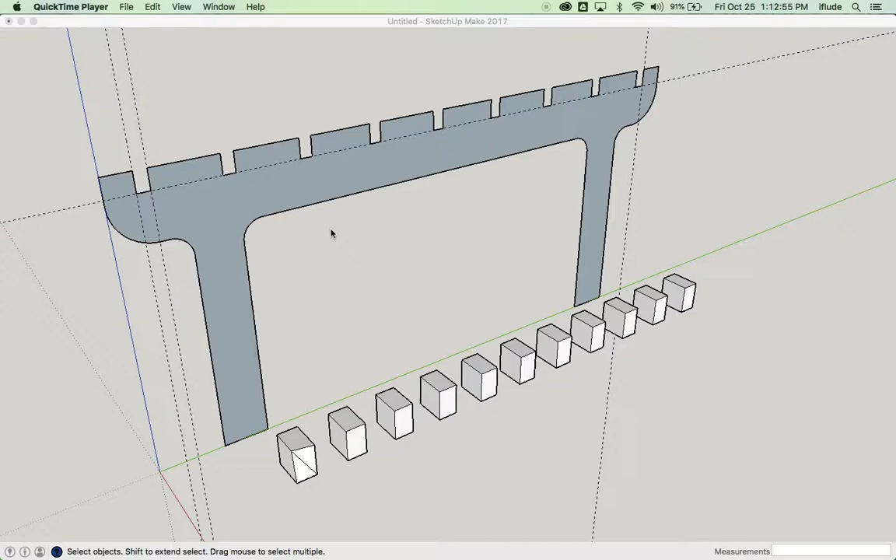So in the previous video, I just used these little blocks down here to explain the concept of moving and copying, and then making multiple copies based on that. Now I want to get rid of those, because they're not part of this model.

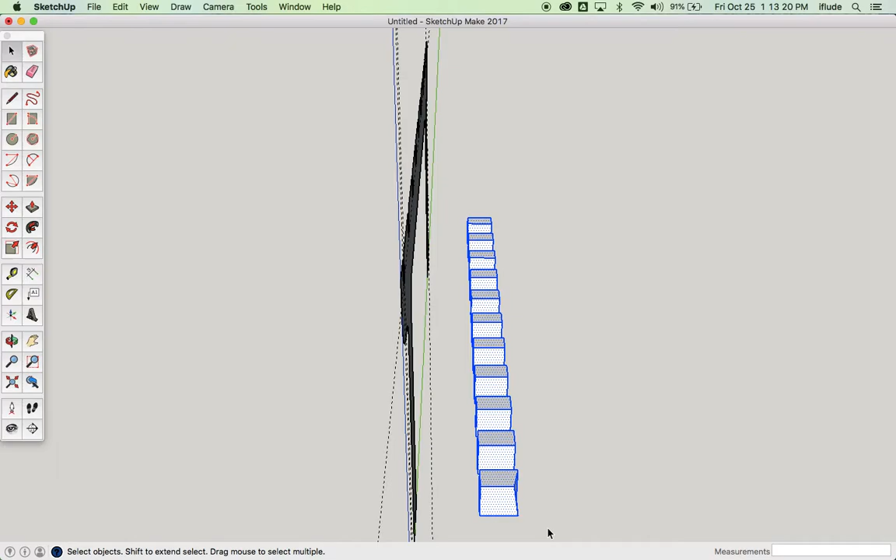So I'm just going to move my view around here like that, and then use my selection mode where I'm selecting everything within my marquee, in order to select those really easily.

Alright, so I have my slots now, and I'm going to keep my drawing nice and neat by getting rid of the guidelines that I don't need. And I can now...

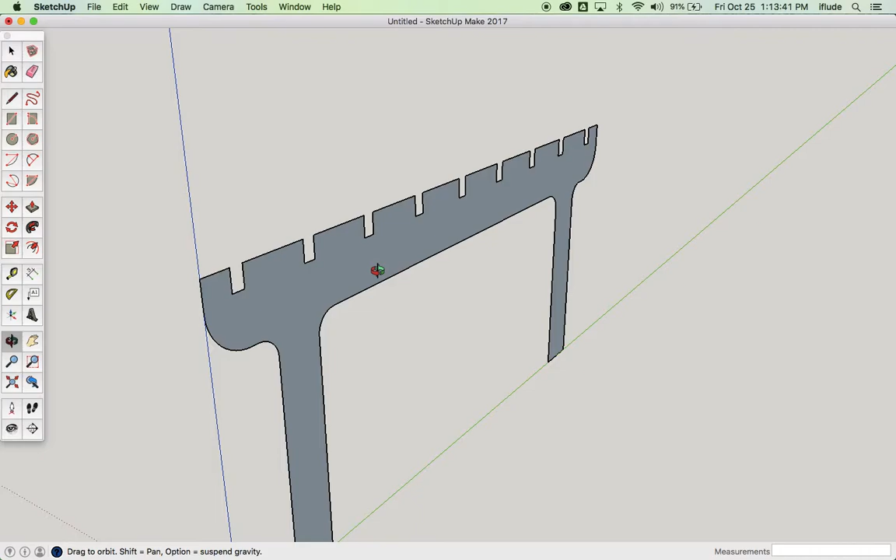Use the push-pull tool to make this 18 millimeters thick, which is the correct thickness according to the booklet. 18 wide. I'm sure it says on here somewhere the thickness. Let's have a look.

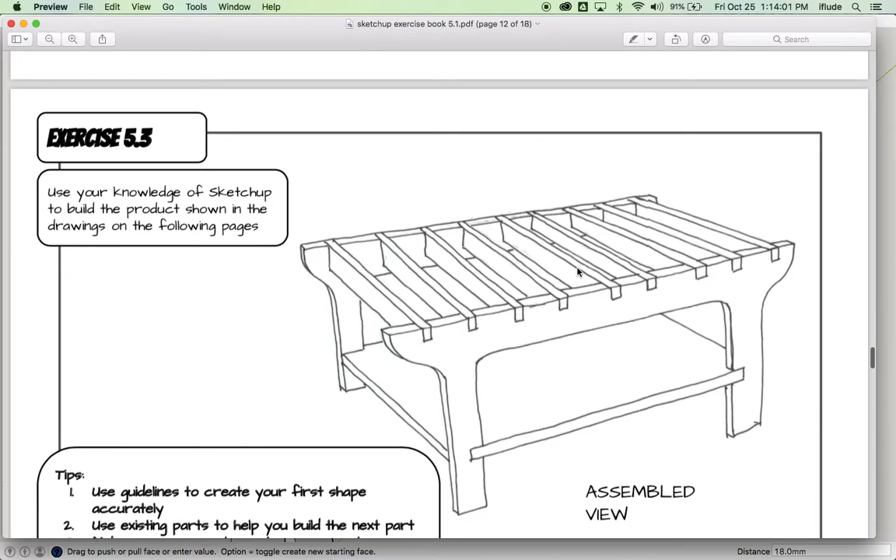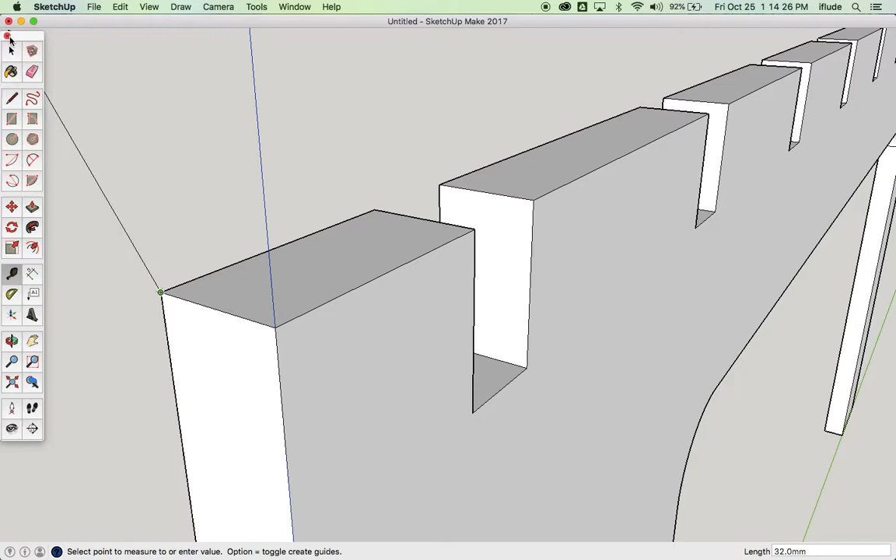Okay, well it doesn't say the thickness, but actually the thickness is 18, so I should probably fix that on the booklet. Now, I can't remember whether I actually made it the correct size. Oh yes, I did. Okay, so now that it's 18 thick, I can triple click on it, make it into a component, because I'm now going to use this for the next step of building my product.

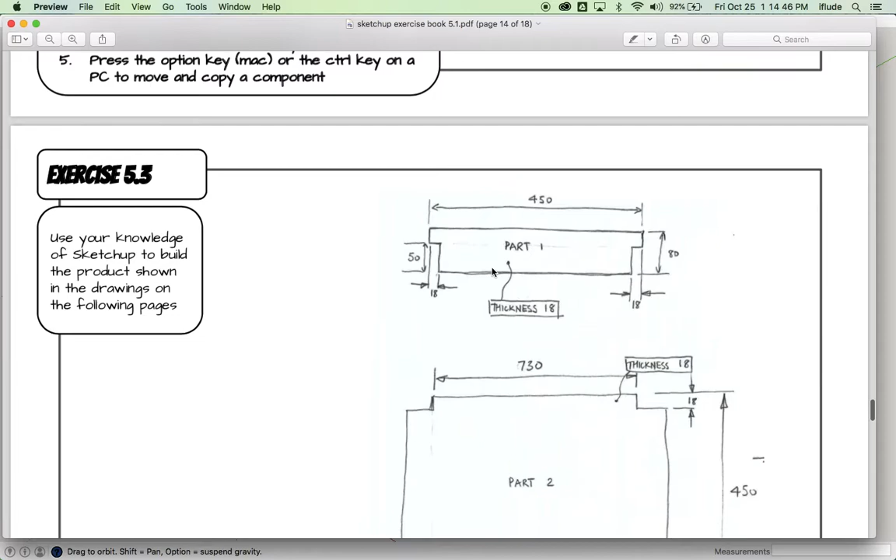Alright, so go back to the booklet, and we have these cross members here, 18 thick, and you can actually kind of work out the thickness that the side part I just made needs to be by looking at this little slot here, at this distance, part of this cross member. Now that's the next thing I'm going to build, and it's 450 wide.

The slot is 30 deep, because you can see 80 minus 50, and it's 18 thick. So remember that distance of 80.

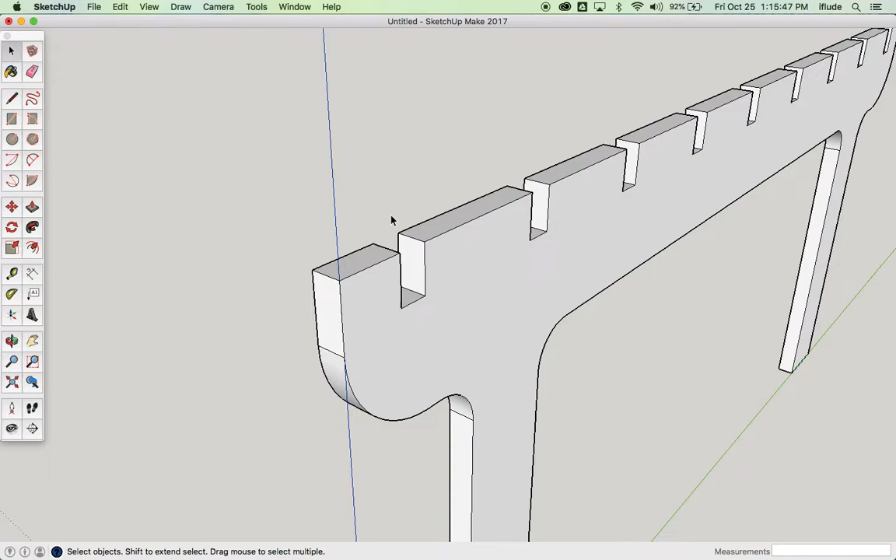Now a lot of people would then start making this separately and then move it into place. There's actually a much easier way of doing it, but if you use the existing piece that you've made, if you've done it accurately, you can use it as a real quick way of helping you build the next thing you need to make. Now, as you just saw, this is already a component, so I can use it without worrying about making any negative impacts on it to build the next thing.

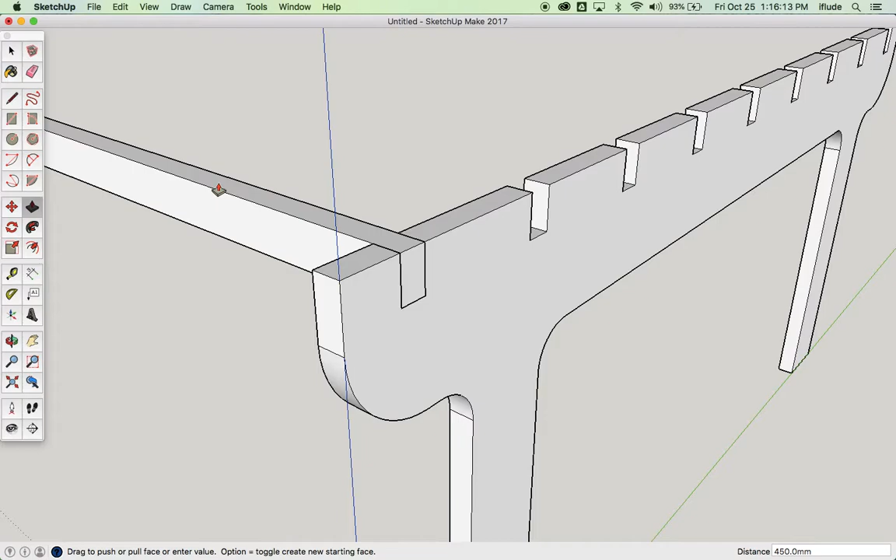So I've drawn a rectangle in there, and I know that the piece I need to build is 450 wide. So I'm just going to push-pull that to 450. And there's my first part.

Now it's not finished yet, of course, because you can see from the booklet the shape has this little cutaway part in it, but that's also extremely easy to make, by doing the following.

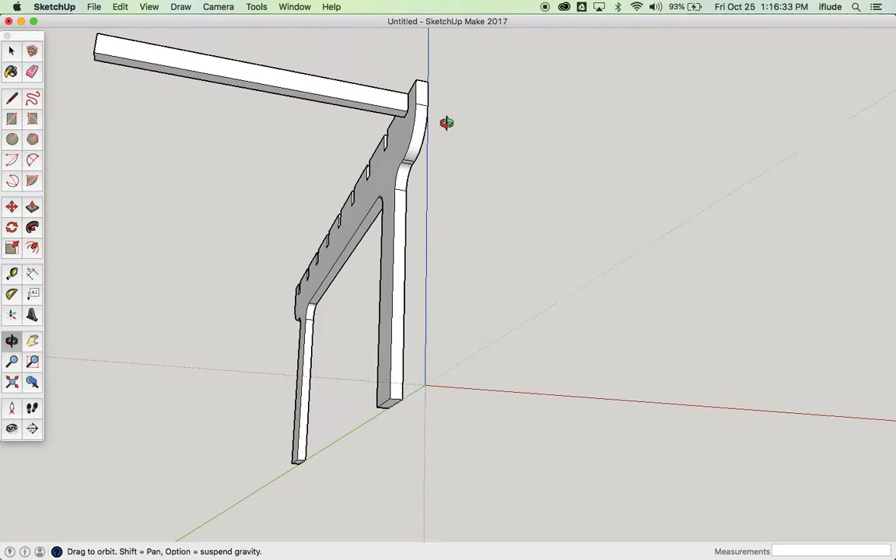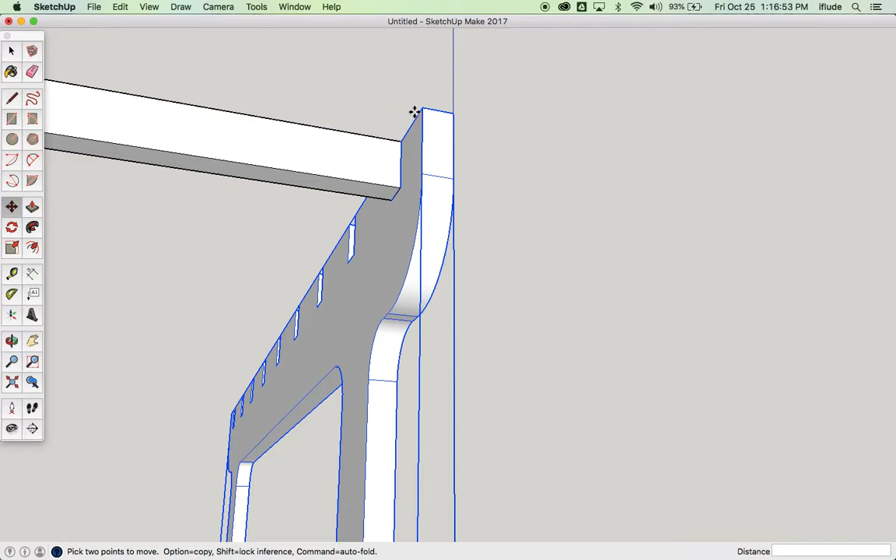So I'm going to take my pencil tool and draw from that point there to that point there. You may not have seen anything happen, it doesn't look like anything's actually happened, but if I move that slightly away, you can see I've drawn a line on the rectangle.

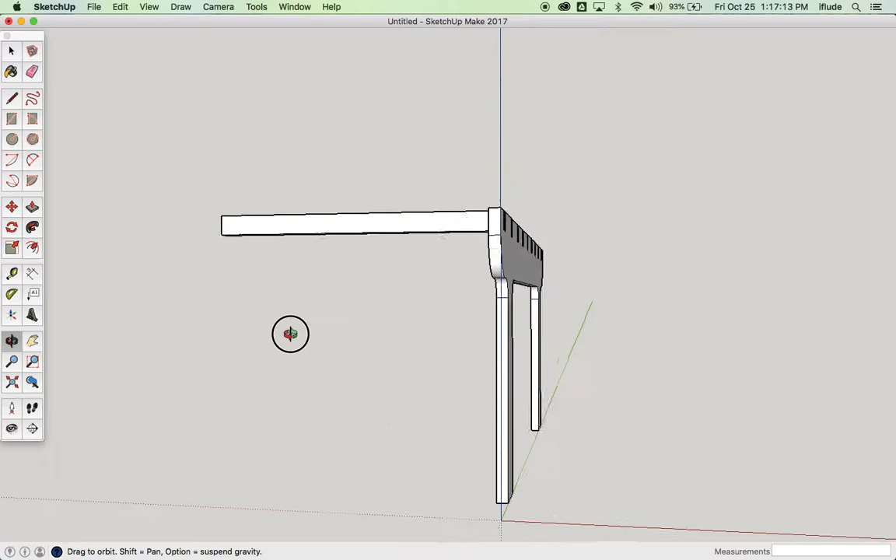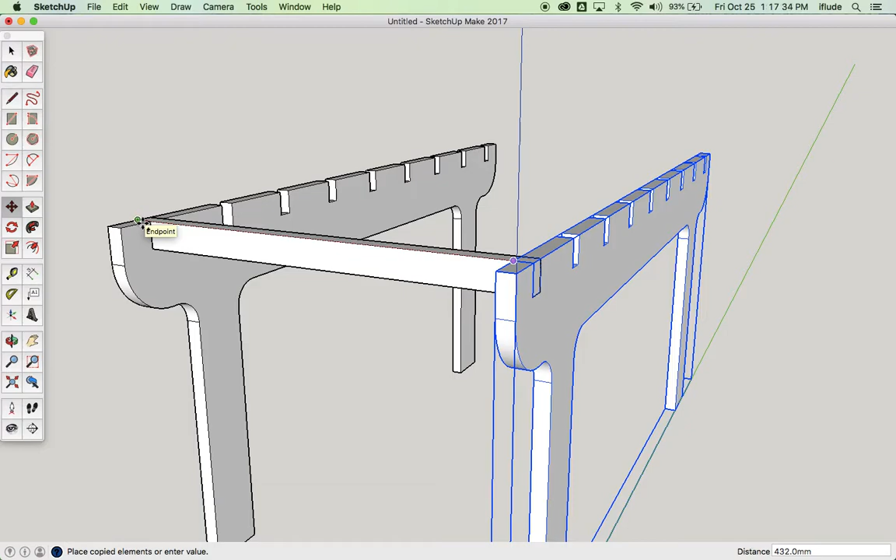So I'm just going to undo what I did by hitting Command Z, and then in order to allow me to do the same thing at the other end, I'm going to make a copy of this side piece by using the move and copy function, picking it up, hitting the Option key, picking it up by that corner, dragging my copy across until it snaps onto that corner there, which allows me to take my pencil tool and draw a line in much the same way as I did before, right there.

Okay, so I now have the basic sizes of my table, because the two sides are 450 apart, as they should be according to the drawing.

All I need to do now is make this part the correct height, which is 80, which means I need to drag it down by 50.

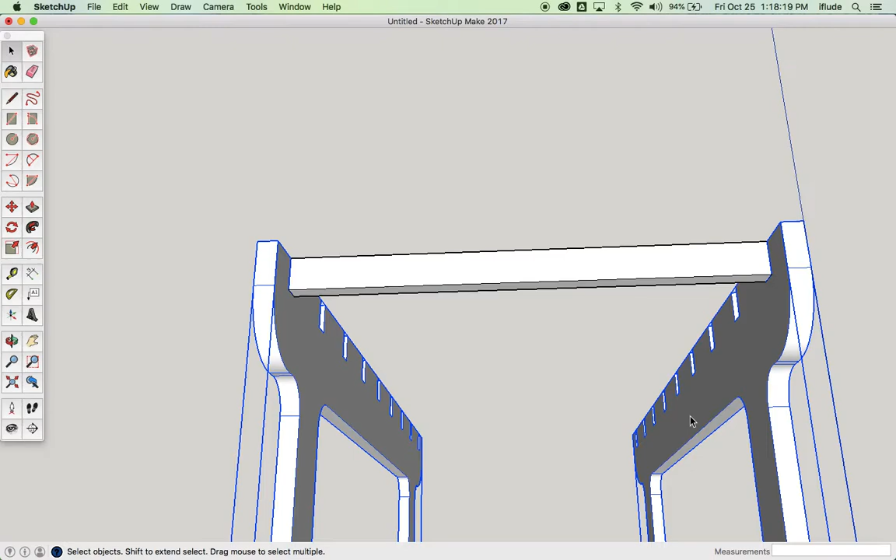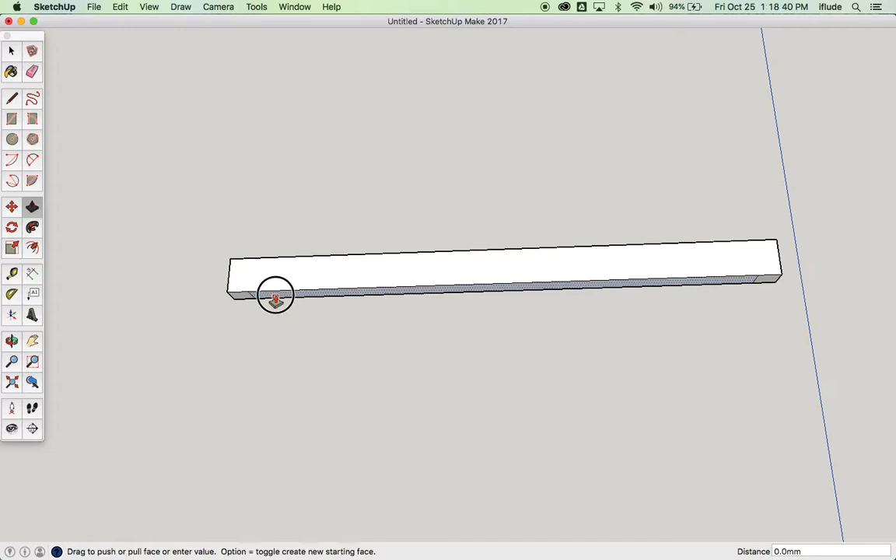Now if we just very quickly hide these two guys here, you can see that I now have my rectangle, and because I drew these lines on it, I've split the surface at the bottom into three. That surface there, and that surface there, are all separately selectable, which means I can use my push-pull tool to drag that down by 50 without affecting the other parts.

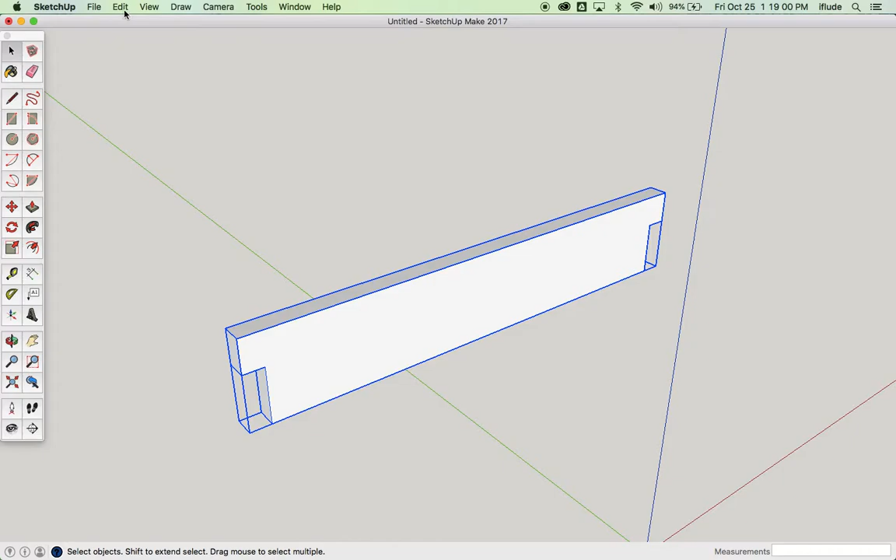And now that is all I need to do to make that cross member. So I'm going to make that into a component, and bring back the two side pieces.

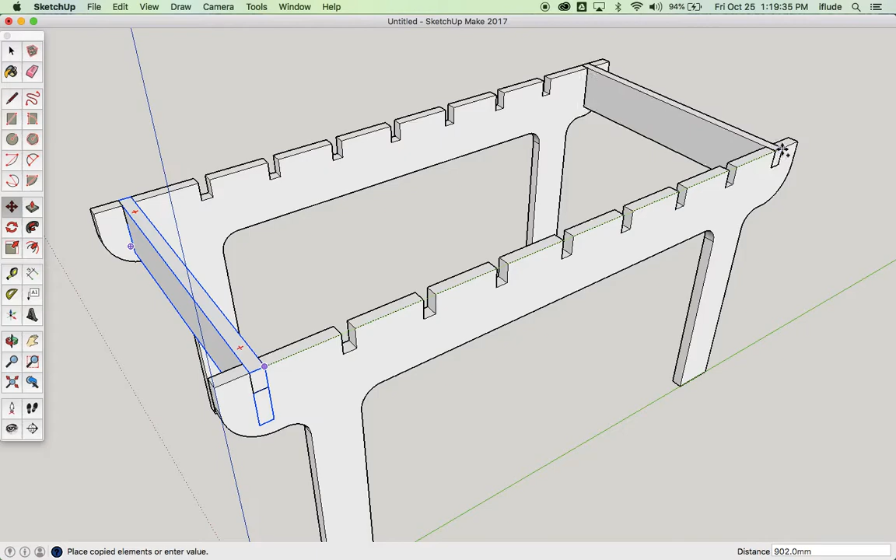In much the same way, in fact exactly the same way as I multiplied the shape I drew to make the slots, I can now do exactly the same thing with this cross member in order to make all 9 of them. So, move tool, hit the Option key, which gives me the copy function, and I pick it up by that corner, take it up here, snap it onto that corner. And just like I did before, I hit /8, and that gives me all the copies I need in between.

Which gives me my product, except for the final feature that I need to make, which I'm going to do in the next video.